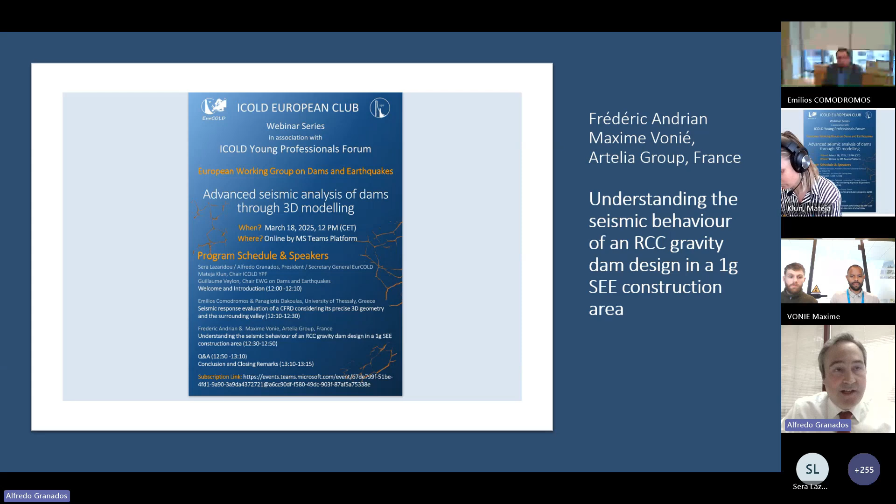Presentation titled Understanding the Seismic Behavior of an RCC Gravity Dam Design in a 1g SEE Construction Area by Frederic Andrian and Maxime Vonie from the Artelia Group. Frederic Andrian holds an MS in civil engineering from the University Joseph Fourier of Grenoble. At Artelia, he is technical director and project director for the Dams, Hydropower and Infrastructures business unit. Maxime Vonie holds an MS in civil engineering from INSA, National Institute of Applied Sciences of Lyon, and at Artelia, he is civil engineer for the same business unit. So please, Frederic, Maxime, the floor and the screen is yours.

Well, thank you very much. So we're going to try to share the screen. It's not this one. Yeah.

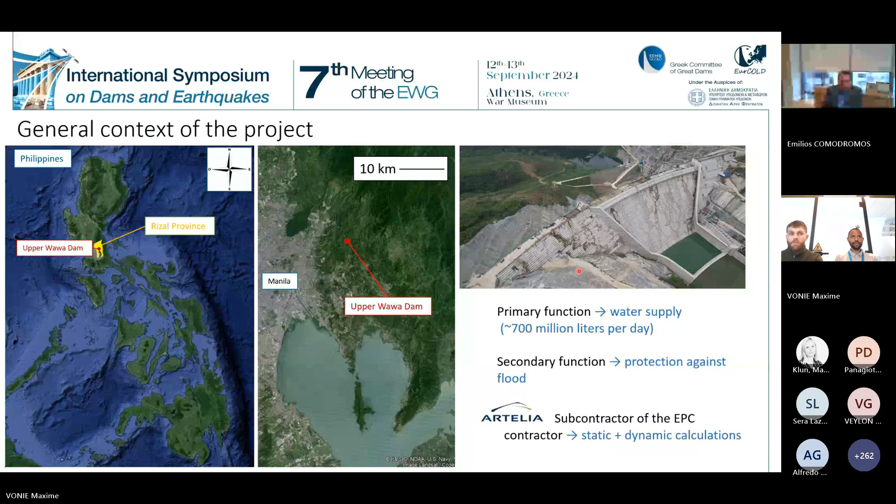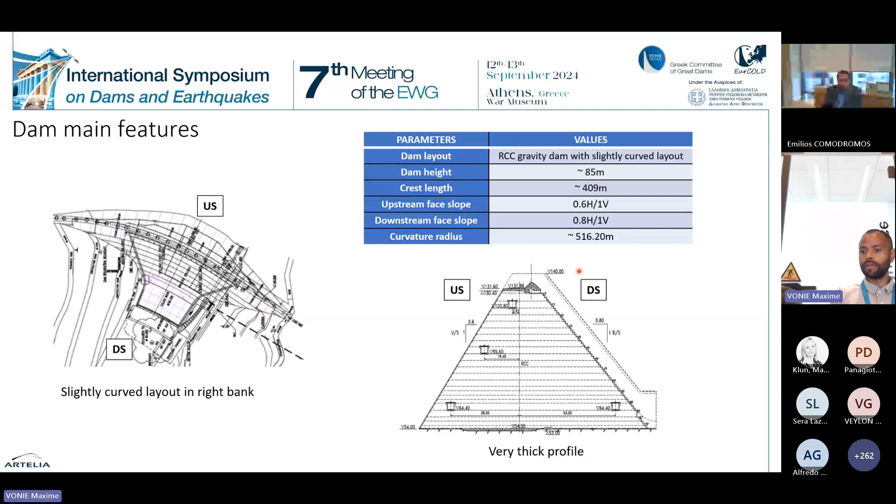So on the left side, you have the plan view of the dam, whereas on the right side, you have a typical cross-section of the dam, highlighting the quite thick profile. Next slide, please.

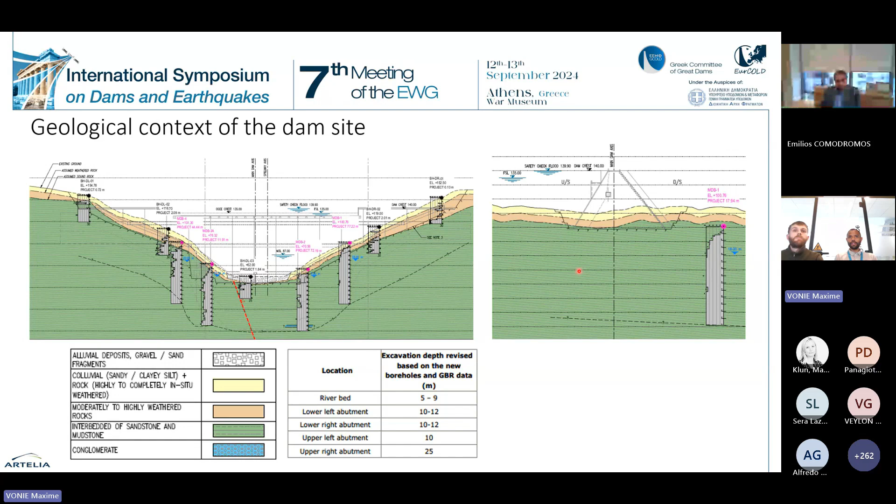So geological context, we are in the context of sedimentary to metamorphic formations. Let's say the substratum is made of interbedded sandstone and mudstone. Here on the pictures, you can see the thickness of the weathered layer, which was removed during the excavation works, and a picture of some samples of core boxes.

The interbedded mudstone and sandstone is rather massive, but with moderate strength. We are talking of a geological strength index of 65 and uniaxial compression strength of 35 MPa on average.

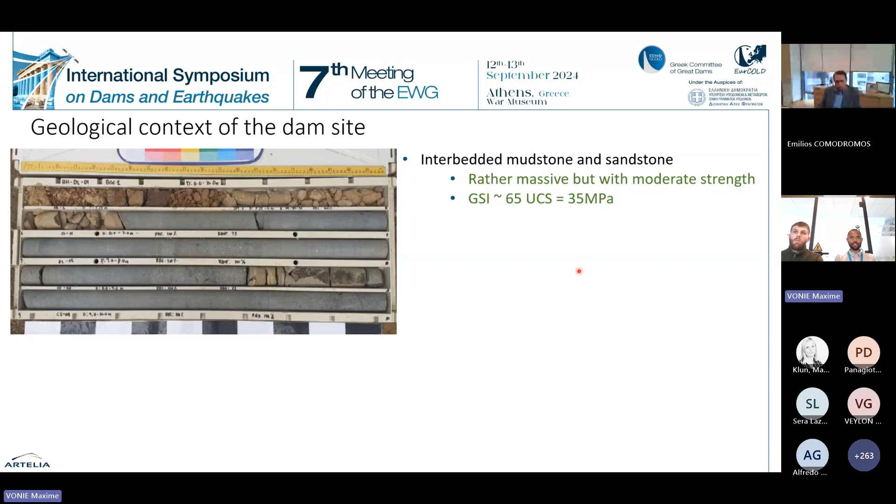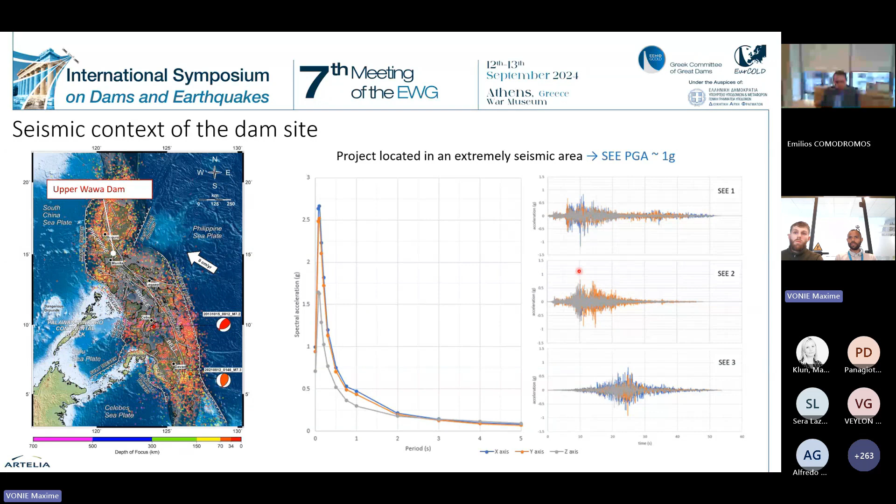As we are talking of the Philippines, the dam is constructed in a very high and severe seismic area, at the connection between many tectonic plates. We are talking of a PGA of 1g for the safety evaluation earthquake. On the right side, you have the uniform hazard spectrum, if I remember, along with the accelerograms, which were used in the calculations later.

So the calculations have used what we call a state-of-the-art gradual approach. First of all, we have used a finite element model for the response spectrum analysis in order to assess the main eigenmodes of the dam in a linear elastic model with ANSYS.

And then nonlinear time history analysis was carried out with FLAC3D in order to capture more realistic seismic behavior, including the dam contraction joints, the dam foundation interface, and all the dynamic interactions, including the foundation and the reservoir, which will be detailed afterwards by Maxime.

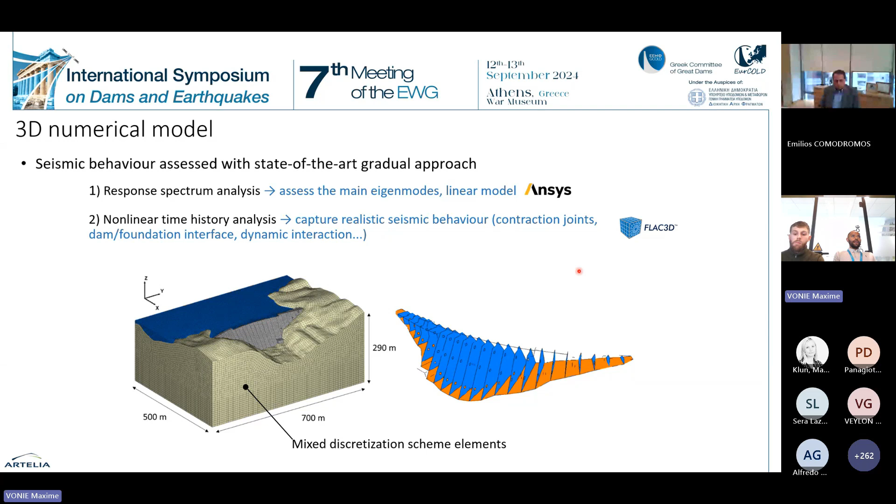About the mechanical assumptions, for Artelia, we are talking of input data. We have not participated in defining nor in the determination of the parameters. So in the numerical analysis, the dam roller compacted concrete and the foundation bedrock are modeled with a linear elastic constitutive law. The contraction joints and the dam foundation interface follow a Coulomb friction constitutive law with tension cutoff. In the tables, you have the main parameters. I will not go through them in detail.

About the hydromechanical assumptions, the dam-water interaction for the dynamic calculations was considered by means of compressible elements for the reservoir. Then the uplift was addressed as additional forces applied at the dam foundation interface according to the US Army Corps of Engineers approach. Then the silt pressure is also applied as additional forces to the upstream face. And the sediment liquefaction was considered as well in the calculation.

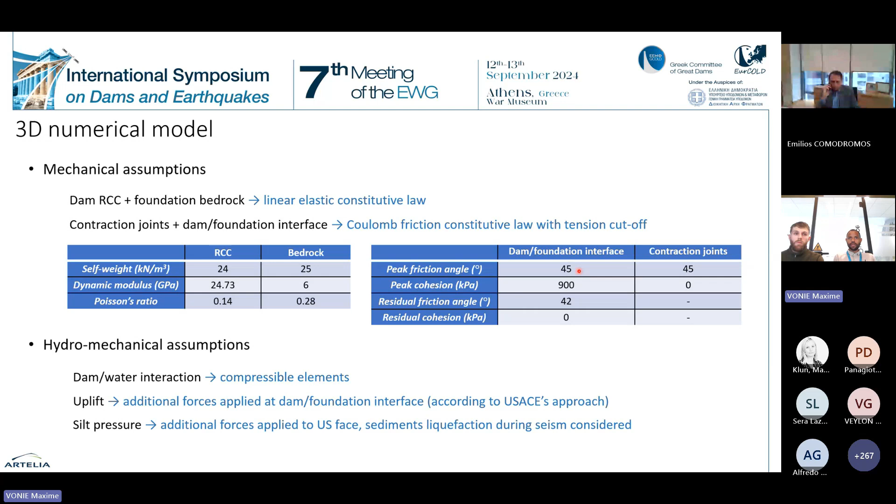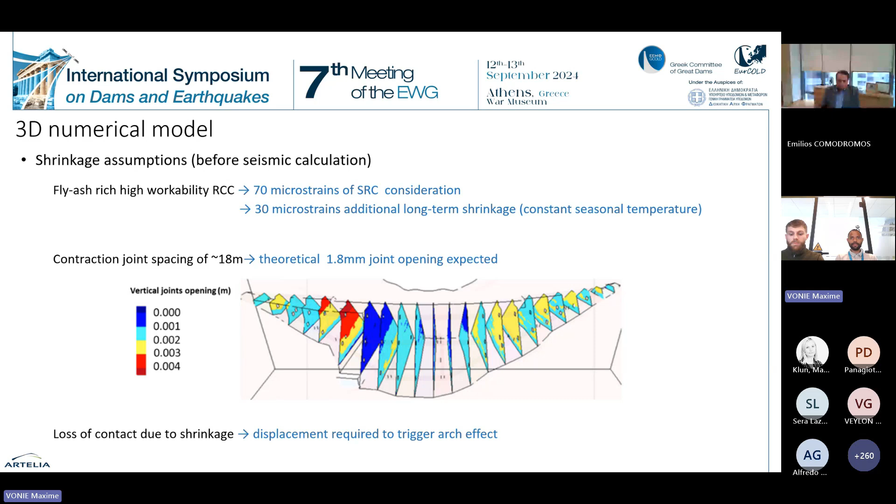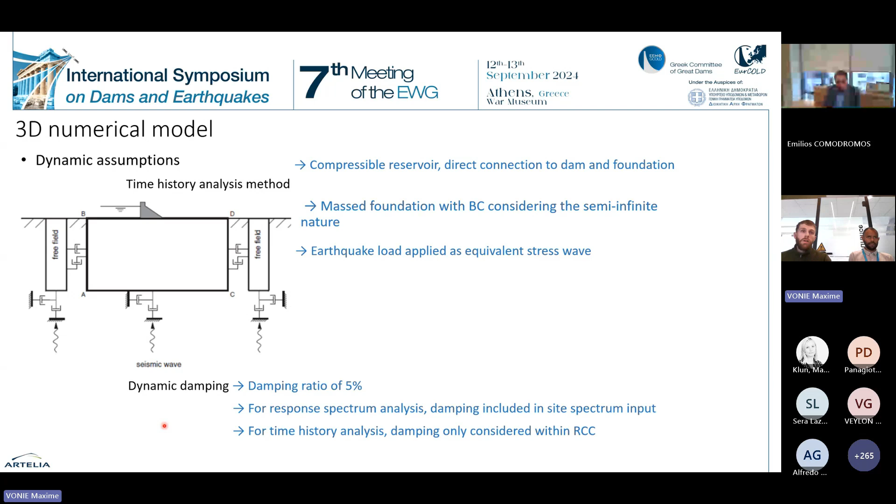Regarding the dynamic damping, a damping ratio value of 5% is considered for all the calculations. For the response spectrum analysis, the damping is directly included in the site spectrum input. And for the time history analysis, the damping is only considered within the concrete and not within the foundation.

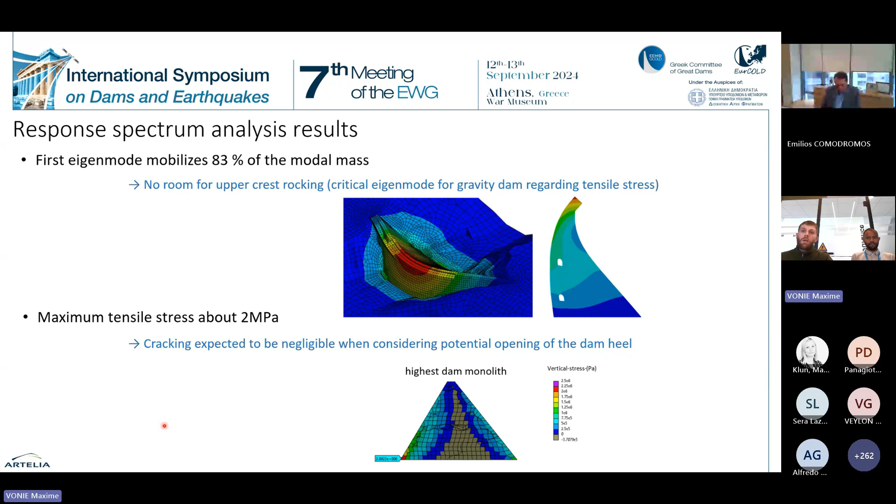Consequently, cracking is expected to be negligible when considering the potential opening of the dam heel, which is not possible here because the model is linear and the opening between the dam and the foundation is not allowed. But in case of opening, it will generate a redistribution of stresses.

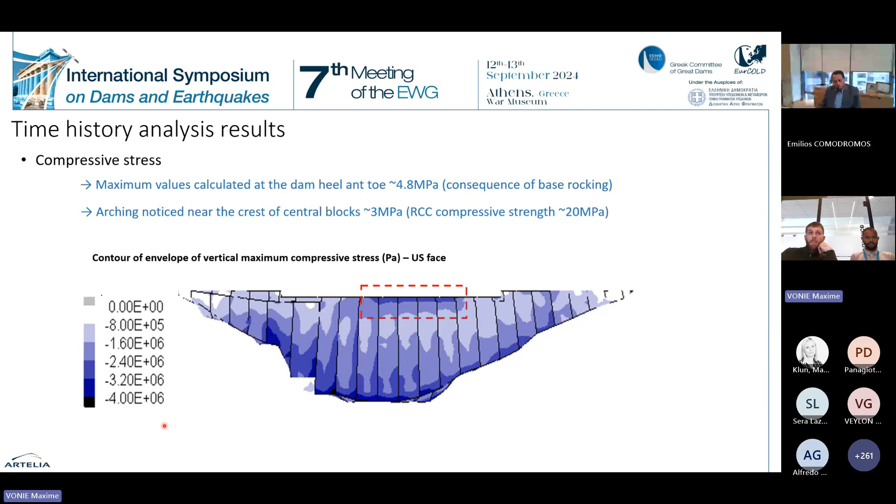And to explain this behavior, we will show you a short video.

Can you just tell me if you can see the video? Yes. Okay.

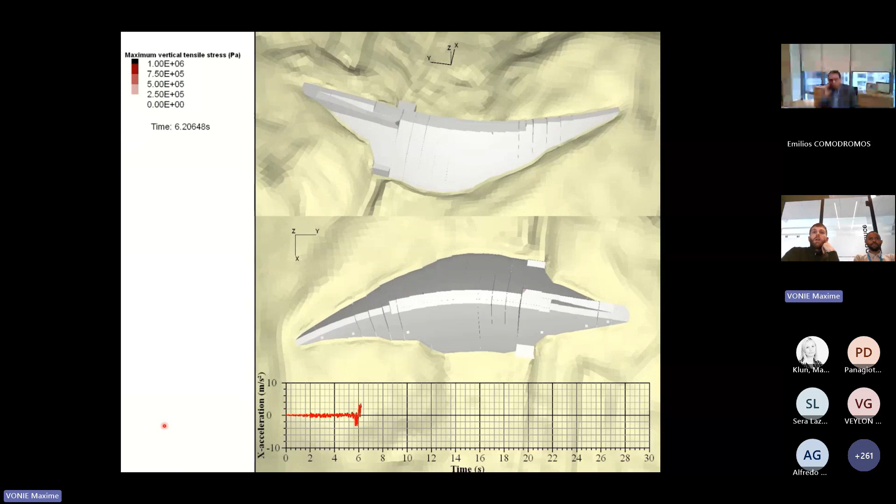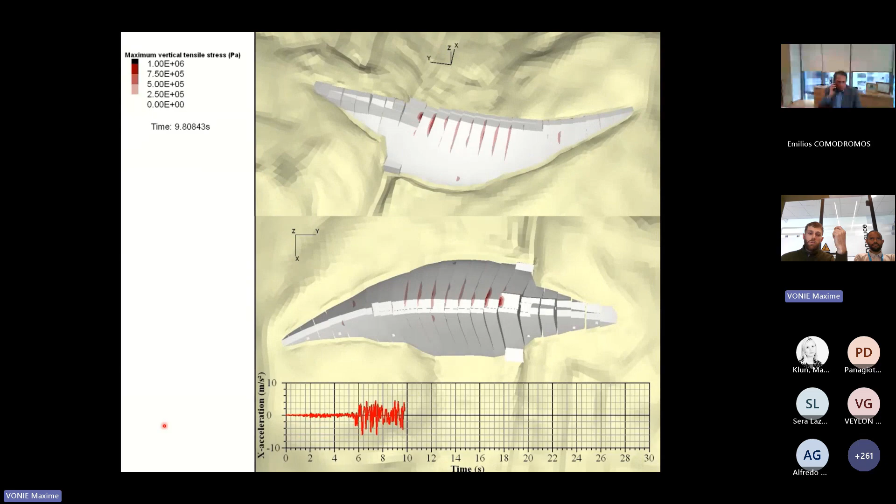On the video, you can see that tension is only visible during very short periods. And the explanation that we found is the absence of permanent contact between blocks during the earthquake, allowing them to move independently depending on the seismic loads. And this allows adjacent blocks to acquire different velocities during the earthquake when the contact is lost.

And once the contact is recovered, it generates dynamic friction, explaining the presence of this tension along the joints. And once the velocities of two adjacent blocks are the same again, the stresses disappear and there is no more dynamic friction.

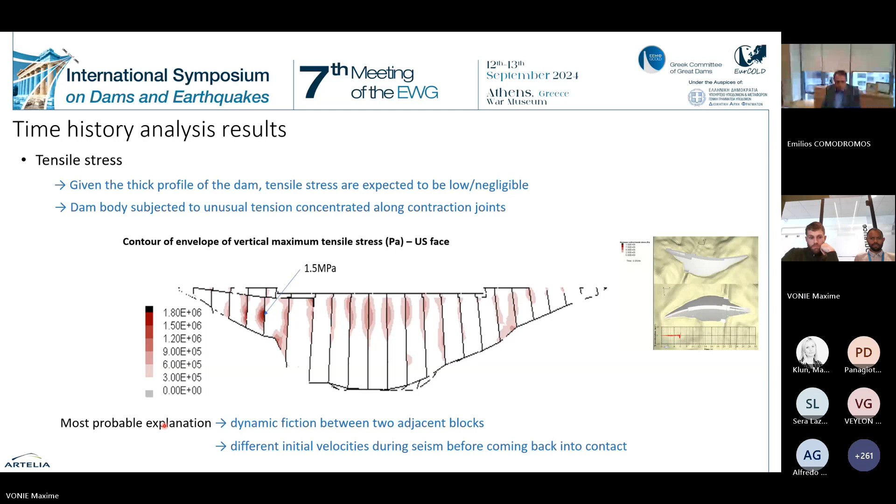Still for the time history analysis, regarding the dam-foundation interface behavior, you can see that the minimum sliding safety factor that we computed is a value of 1.2. Consequently, sliding is not expected. However, as you can see on the picture, irreversible shear displacements affect, for some blocks, the whole contact area.

As you can see here, highlighted in red for one block, for one part of the contact. And this is not consistent with the safety factor values that were obtained by the calculations. And to understand this behavior, we made an analysis of the dynamic behavior, and it shows that sliding is not instantaneous, but gradually spreads from upstream and downstream.

As you can see on the second picture, giving the temporal evolution of the shear displacements for the block highlighted in red in the first figure. And consequently, safety factors can stay higher than 1 during the earthquake, even if the final behavior shows overall sliding.

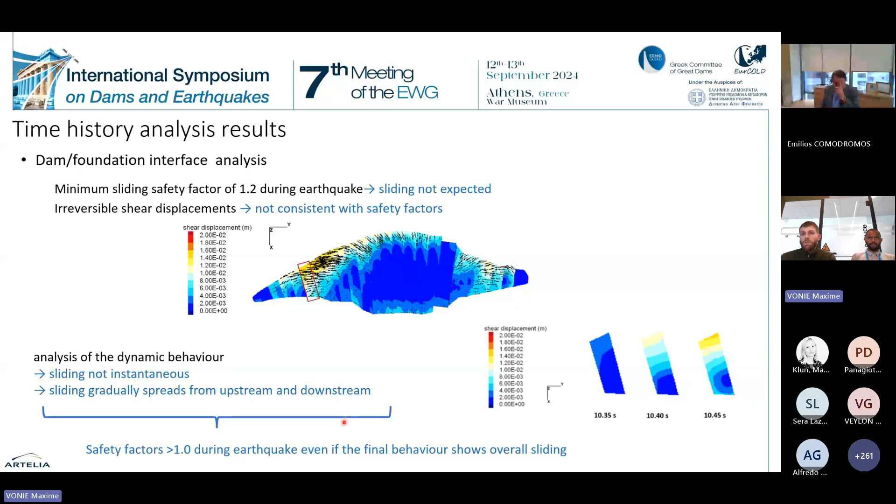And to finish, the presence of sliding may induce irreversible opening due to dilatancy, and this may increase the permeability of the bedrock. And to take this into account, we did a post-earthquake situation with the following assumptions. The full uplifts are applied to the sheared area in contact with the reservoir, which is plotted here in red in the figure. And residual strength parameters are applied to the contact.

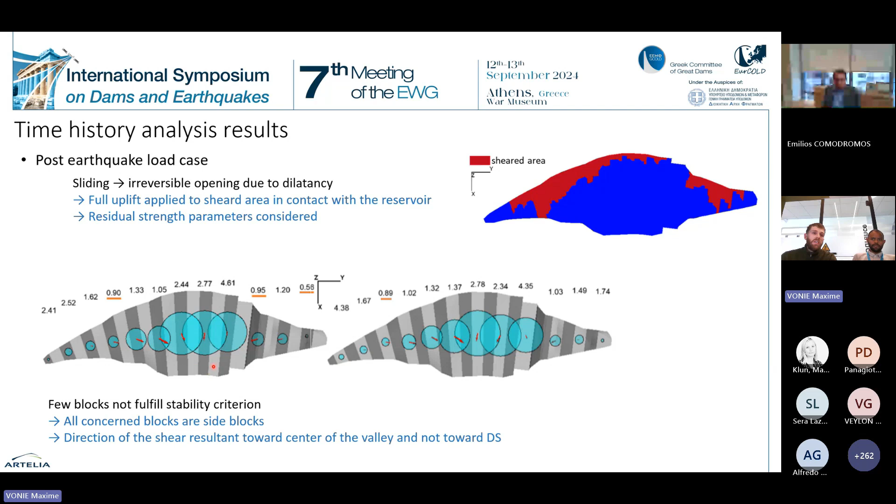And with these assumptions, a few blocks do not mathematically fulfill the stability criteria. As you can see on the picture, some sliding safety factor values are lower than 1. But a closer look shows that all the concerned blocks are side blocks and that the direction of the shear resultant is directed towards the center of the valley and not toward downstream. And consequently, sliding is not supposed to generate any uncontrolled release of the reservoir.

Okay, so a few words of conclusions. If I can recall the criteria according to ICOLD's recommendation, I believe we are talking about ICOLD Bulletin 148. The behavior of the dam is acceptable for SEE load case, even if there is any damage, as long as there is not any uncontrolled release of the reservoir. So when talking about this criteria, the Upper Wawa Dam, as designed, complies with the state-of-the-art criteria regarding earthquake load case.

However, the dam does not exhibit the usual upper crest rocking mode shape, owing to the very thick profile of the dam, which means that the usual high tensile stress encountered at the crest of the dam is not present here in the calculation. The arch layout of the dam also allows some keying, which prevents an overall displacement of the dam toward downstream and sliding. Still, we have highlighted some limitations in the behavior of the dam.

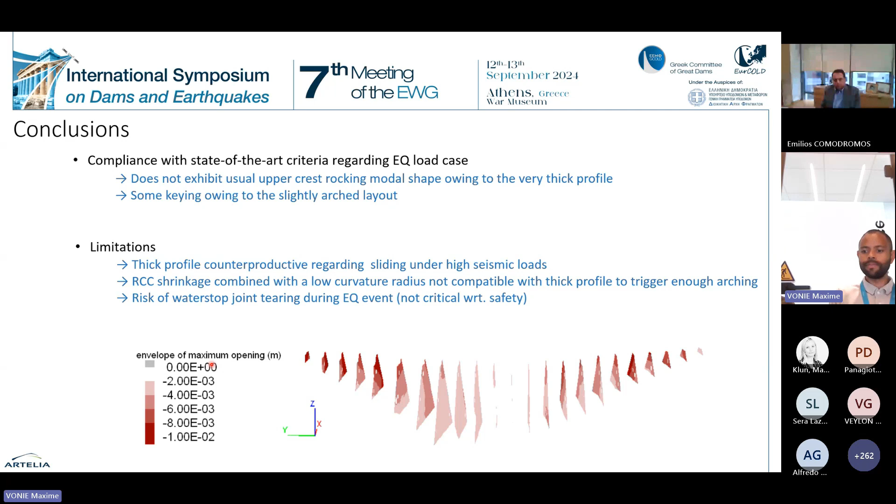So if we can suggest a few improvements for future dam design under similar conditions, we believe it would be better to use shear keys in contraction joints to avoid the offset of blocks during the earthquake, and then avoid dynamic friction between adjacent blocks. Then another improvement may be to add a seismic belt at the crest of the dam in order also to prevent any offset between the blocks. And maybe a solution, which needs to be the purpose of detailed design, of course, would be to reduce further the curvature radius of the dam and reduce a little bit the thickness of the dam profile in order to adopt a more usual profile.

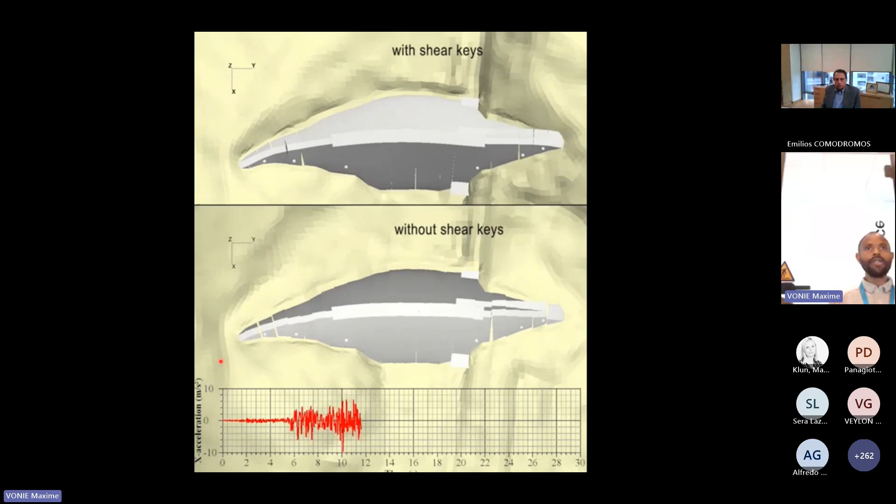And now we are going to show a video of the dam, which shows the behavior of the dam if the dam is equipped with shear keys. The top video, and the bottom video as a comparison, the one without the shear keys. As you can see, there are not any red spots anymore on the upper video as a consequence of the added shear keys.

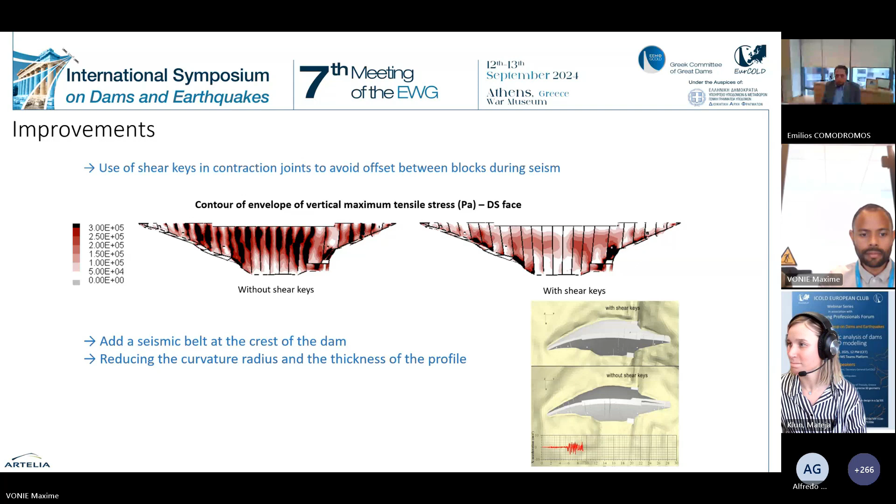So we proceed with seismic response evaluation of a CFRD, considering its precise 3D geometry and the surrounding valley, by Emilios Comodromos and Panos Dakoulas. Emilios Comodromos is professor of civil engineering at the University of Thessaly in the domain of geotechnical engineering, structural engineering, and soil-structure interaction. And Panos Dakoulas is emeritus professor of civil engineering at the University of Thessaly, and he's specialized in soil dynamics with focus on dams and port facilities.

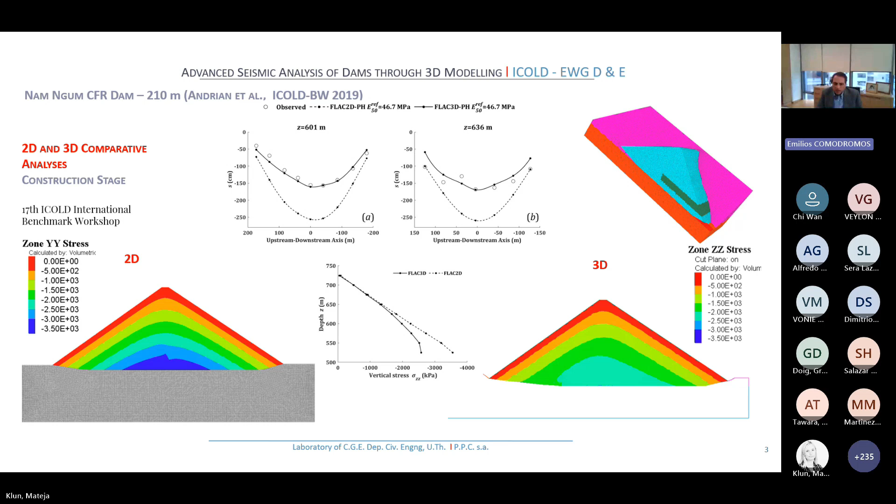So to further investigate this effect, we plotted the stress development across the crest of the dam. We can see that in the next slide, please. Here it is evident that there is some kind of hanging of the dam to the abutment, to the canyon, where we can see an increase of the stresses on the abutment and a decrease of stresses in the dam. And this is more important when we are moving to the base.

At the right, we can see clearly that at the same level, we have considerably lower stresses in the dam. And of course, further to the difference in settlements, we have a difference in the stress developed in the dam. And all of us know that the state of stress also affects the behavior under seismic action. Can we move to the next, please?

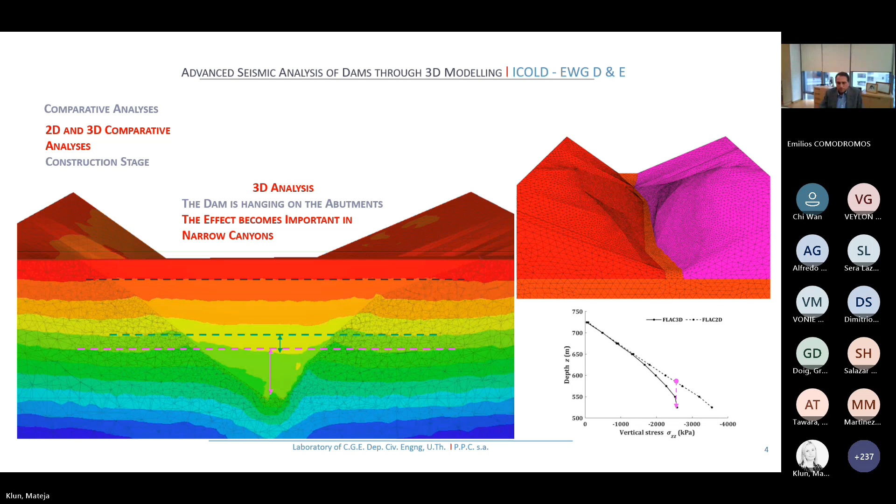Can we move to the next, please?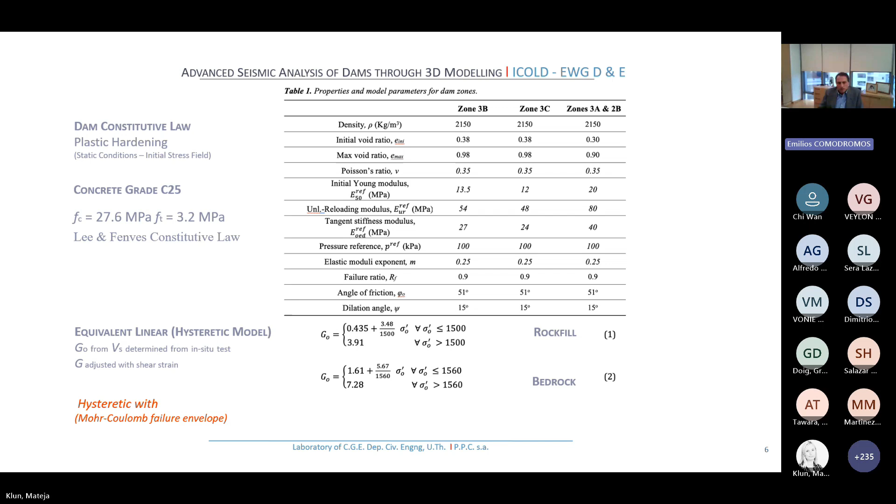The next slide, please. Here we have the finite difference grid we have used for the surrounding valley, the dam, and the panels. To the next, please. And here we can realize that the abutments were not planar. So we can imagine that we have an important interaction effect at this area. So it is something that we focused on to find out what the effect could be. To the next, please.

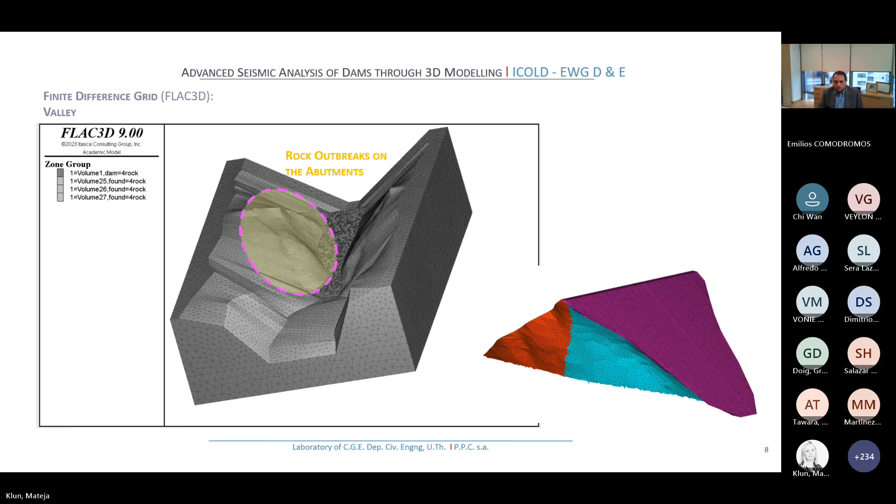Now, considering the concrete panels, we have 23 concrete panels, and the initial joint between them was 1 centimeter. After the construction of the panel, an enlargement at the side of the central panel has been made, and this is mainly done to avoid excessive compression stresses which take place during the embankment.

I have to mention here that the thickness of 1 centimeter involved too many difficulties for the simulation. First, it required a very refined mesh in this area, but we quickly overcame that. We solved this problem with some algorithms we carried out, incorporating the process of the fine grid generation. The main problem was that the too small size of the elements was the reason for a very low time step for the dynamic analysis. Initially, we calculated that using Rayleigh damping, we needed almost 10 days per second of input motion.

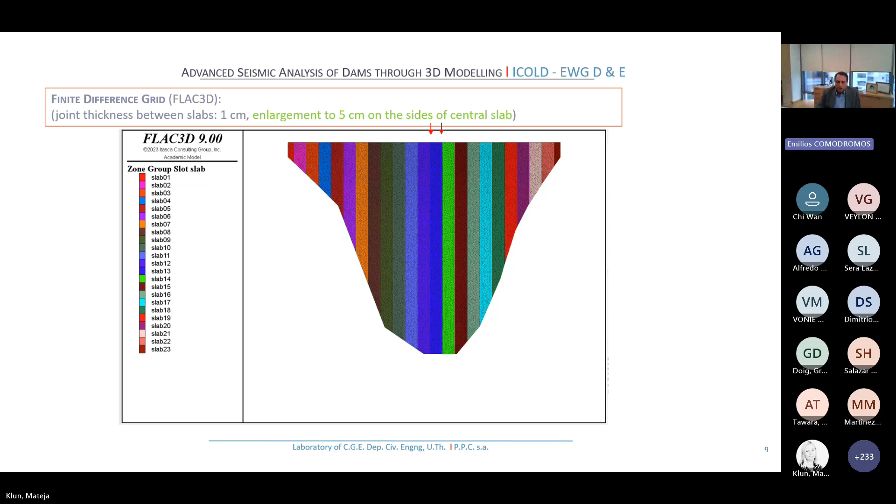Here we have the presentation of how we took into account the hydrodynamic effect of the water in the dam. So the simple approach was to consider the hydrostatic pressure and forces using the simplified Zangar method. And the other option was to consider water elements. Within the process, we took into account both hydrostatic and hydrodynamic effects implicitly. The next slide, please.

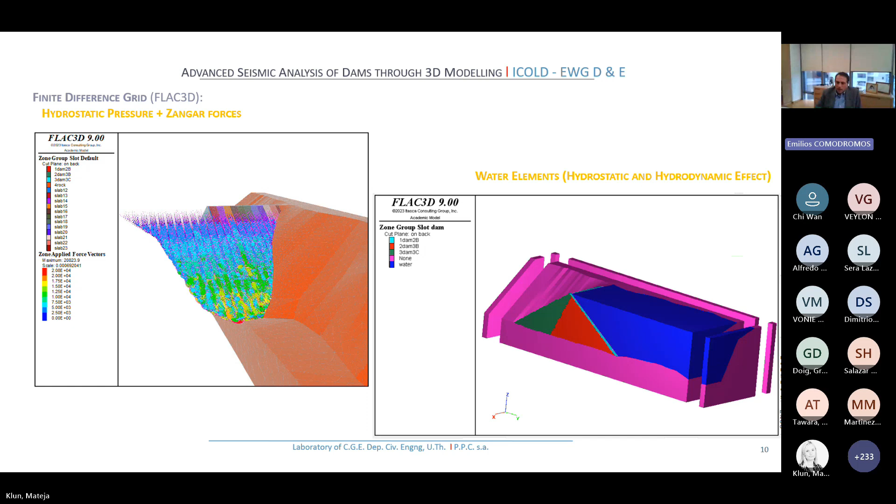Now, because we are focused on the behavior and the response of the concrete panels, we set a zero point, the time started when we constructed the panels, and we consider that they are strong enough to take loads. So we can see at the figure on the left the settlement due to the impoundment and the remaining creep. I mean, the creep is depending on time. So you can imagine that during the construction, each layer has a remaining creep based on the time it was constructed. So we included that in the analysis, and we accurately take into account the remaining creep together with the embankment.

The maximum settlement of the dam was approximately 42 centimeters, and the horizontal displacement, that means across the stream, was of the level of 35 centimeters. We can see it at the graph at the right side on the top. At the two graphs below, we can see the displacement and the settlement at the concrete panels. On the left, we can see the settlements are obviously the same as the dam, but a very interesting figure is the right one, showing the movement of the slabs from the side to the center because of the embankment. I don't know if you can see the numbers.

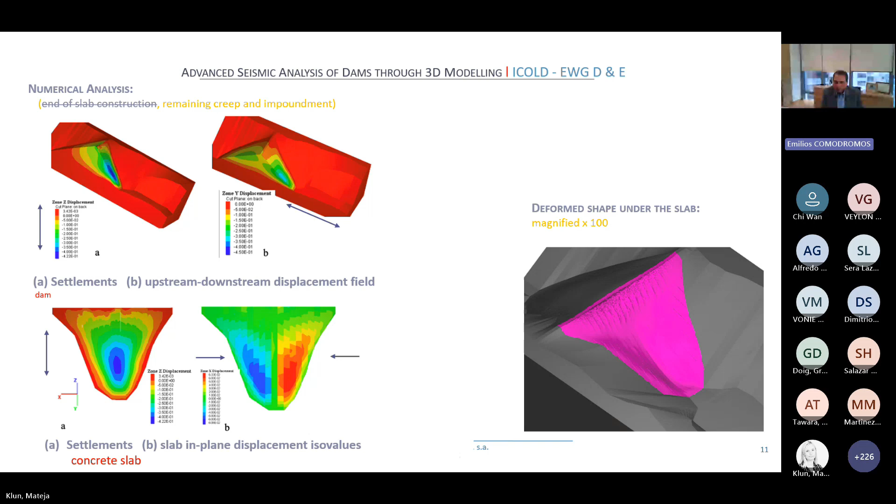To the next slide, please. So now, here we have the dynamic analysis. This is the input motion. We carried out several input motions. Here we are going to show the results from Lixouri, a town on the island of Cephalonia. And we have to say that we tried to use the smallest possible time for the analysis.

So we found the range in which we have 95% of the intensity of each input motion. For instance, here it is between the second and the 8th seconds, and we ran the analysis just for the 6 seconds, because usually on a very powerful computer it required approximately 5 hours per second. And this was made possible using the Maxwell damping, which is 20 to 30 times faster than the Rayleigh damping.

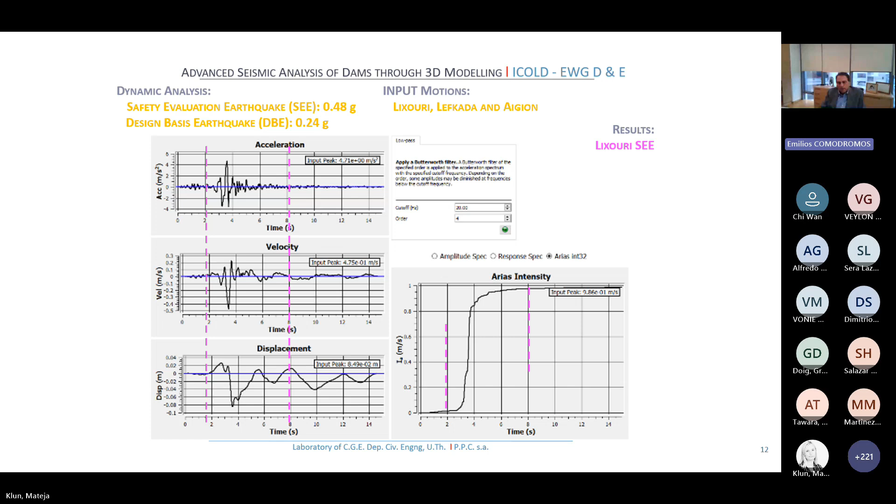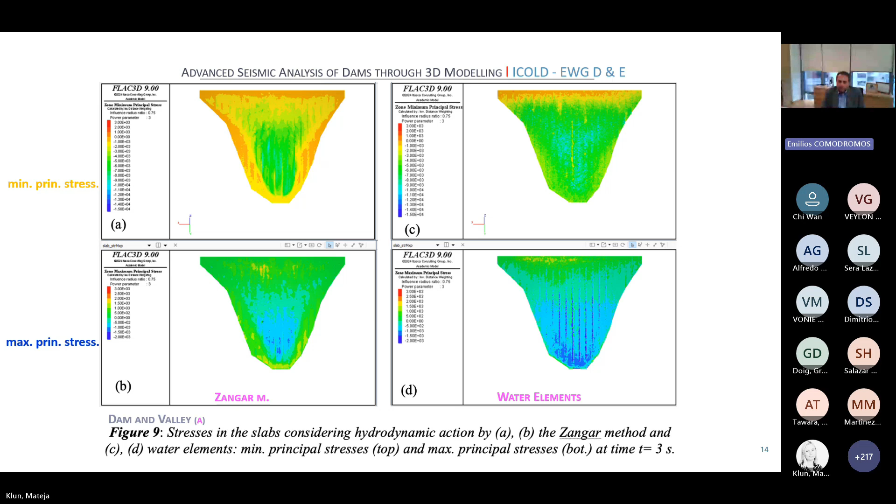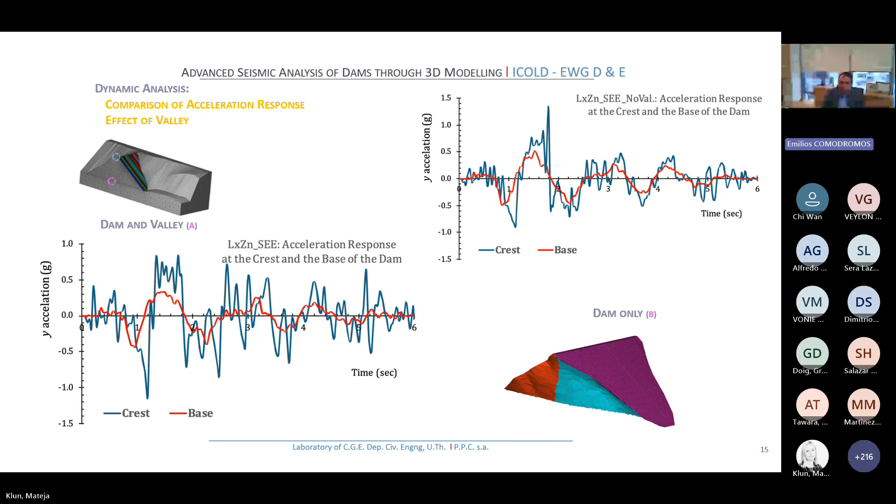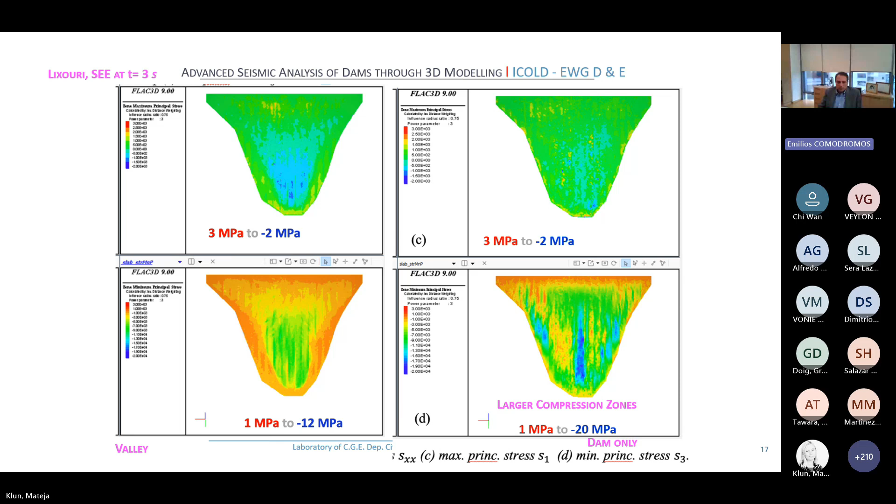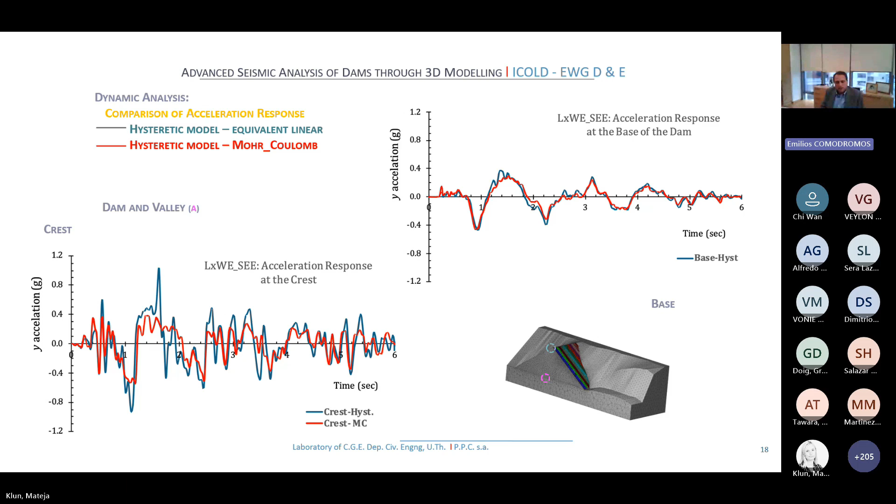That means we gave the possibility to the material to plastify. And as we know, plastification provides the ability for higher absorption of energy. That means less acceleration, but at the same time, we have an effect on the displacement. We can see in the next slide, please, that the displacements we have in the case of Mohr-Coulomb are higher, mainly the remaining displacement.